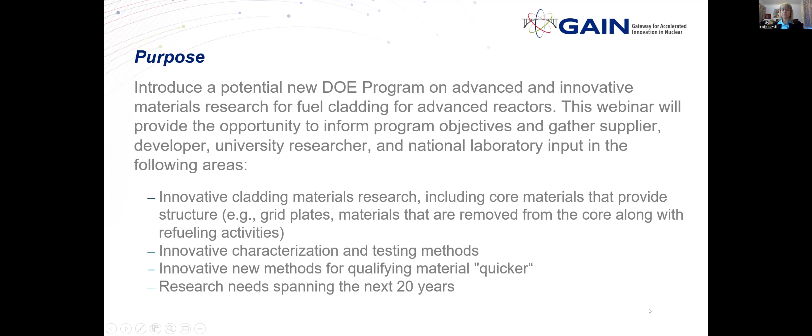The agenda is divided into 3 segments. First, we'll have introductory presentations, followed by presentations on advanced nuclear industry gaps and needs. The final segment will be a focused discussion on those gaps and needs, and this is where we want to hear from you. We want to hear your thoughts, any questions that you might have, and the feedback that you're willing to share. But please don't feel that you need to wait till this focused discussion to share feedback. If a thought crosses your mind, put it in the chat and we'll address it as we are able.

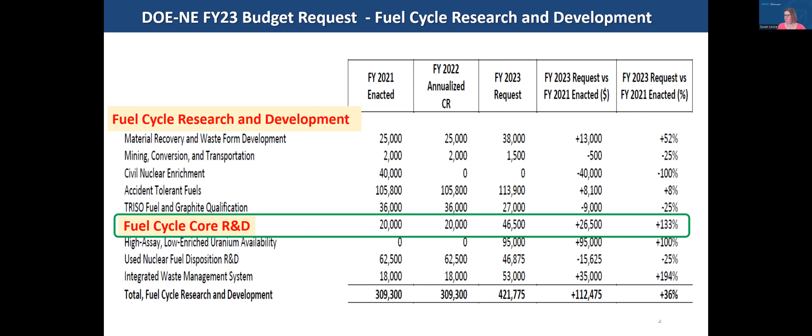So here's a list of the different areas that the fuel cycle core R&D plans to support. And the new innovative nuclear materials programs, as listed here, our goal is to continue our leadership in nuclear materials and our competencies in research and development for nuclear materials to support nuclear energy in the US.

We also want to continue to build on and capitalize on the developments in modeling and simulation capabilities, on instrumentation, on testing, characterization tools. All of these put together should make the process of going from materials discovery through research and development to commercialization much more efficient and quicker than it has been in the past.

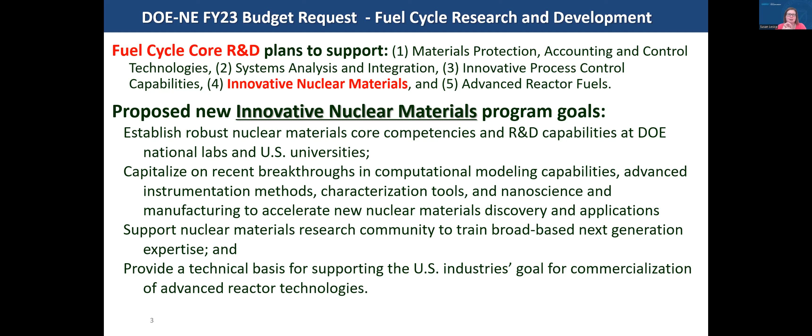So here we go. So here's the goal of the workshop. We want to seek stakeholders' input, and in our case, stakeholders is defined as the people that will actually use the results of the research, as well as the folks that will be doing the research. So this includes the reactor designers and suppliers, to the researchers at universities, national labs, EPRI, etc. And so with that, we wanted to get input into the development of the program, both on the focus of the program and how we plan to administer the program.

We also have a list of what we're not looking for. We are very much focused on research and development. That is the area that has been identified as the gap. We have a lot of other work going on in the demonstration and further down on the commercialization line. So we're staying more, our focus is much more on the lower TRL type of research.

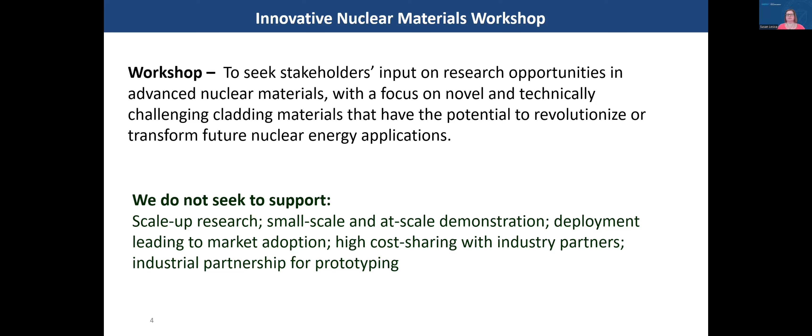So next we have a list of questions, really just kind of to spur some thinking of what could be needed, what type of materials do we need, what type of models do we need in order to predict how the materials will perform and how the environment will affect mechanical behavior further down the line. As you know, these reactors last for a very long time, and we need to be able to predict long-term behavior. I won't read through this whole list in detail, but I did want to put it up just to kind of get you started thinking in this direction.

I also did want to talk a little bit about the administration of the project. We've also been asked, how will we fund the research? Will it be direct funding? Will we have competitions? That type of thing? Will it be cost sharing? And traditionally, we don't do very much for cost sharing for this level of R&D. So our plan right now would be funding the work directly, or either directly or through competition.

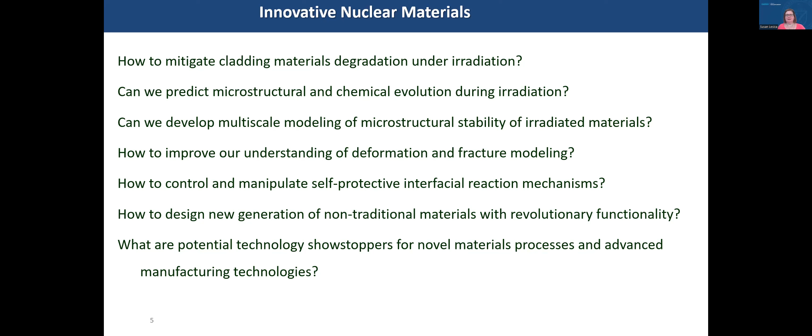So the administration still hasn't been decided, and once we have more information on what we're going to actually perform the research on, I think that will really help us define how we administer the program. So that is the end of the slides that I have. I would be happy to take any questions.

There is the chat feature, if you prefer to write your question or comment in there. Okay, it doesn't look like we have anything in the chat. Okay, I think we can go on to our next presentation then.

So in order to pull all of this information together and inform our decision-making when it comes to the priorities of the program, we have Stu Maloy from PNNL who has graciously volunteered to do that with us, and his experience in this field is going to be extremely valuable to us in developing that. And so now I will pass it on to Stu.

My name's Stu Maloy, and I'm a nuclear materials advisor at Pacific Northwest National Lab, which I've only been in that position for about 3 months now. Previously, as most of you know, I was at Los Alamos, and I was there for about 33 years. So I have a lot of experience in developing and testing materials for cladding applications in reactors. So what I wanted to start with, which I think everybody knows, is that materials, as much as we'd like them not to do this, they can actually fail in nuclear systems.

And that's what, in developing materials in this program, we'd like to avoid. One failure that happened many years ago was, as shown here, where an actual duct that saw significant swelling failed when they went to actually pull it out of the reactor, leaving the fuel in there. So that's not something you'd want.

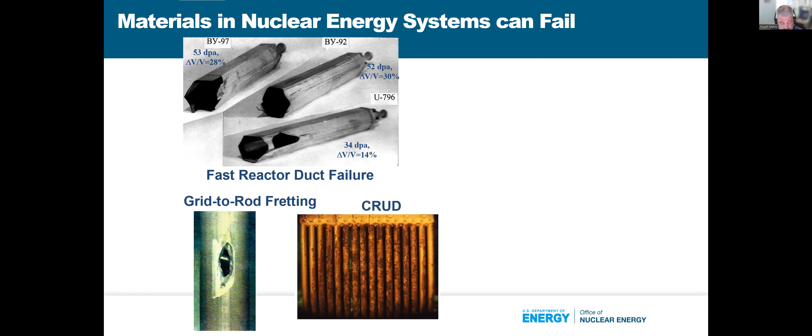Another is grid to rod fretting, which can happen, for example, even in just light water reactors, where you can go right through the cladding with sort of normal operations. Crud is something you want to avoid as well, where it's just a corrosion deposit that can collect in your reactor. And then also larger scale corrosion, as shown in this Davis-Besse reactor vessel head degradation, is something you want to avoid as well.

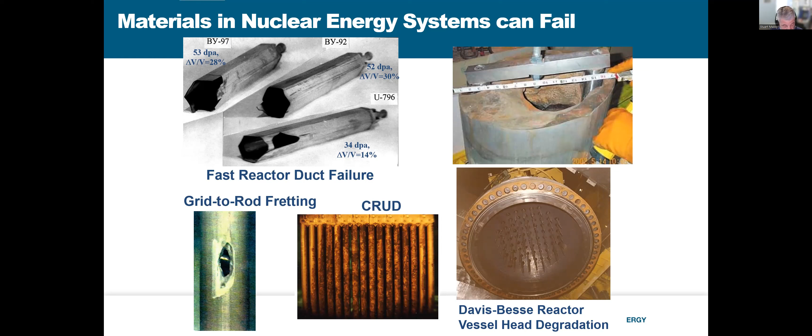So we want to be able to develop materials that last longer in reactor, that we also know the lifetime very well, so that we can avoid having a failure before we actually take these materials out and replace them. So in order to develop these new materials, we have to know what the extreme environments are. The extreme environments for a cladding material come from different things that they're in contact with under irradiation.

So for developing a high dose radiation tolerant advanced reactor cladding material, you have to deal with many different areas. First, you have to deal with interaction with the fuel, especially in a metallic fuel. If the cladding or the fuel is going to stay in this case, we want to push it to higher burn up. If it's going to stay in the reactor for a long period of time, you can eventually get interaction between the fuel and the cladding that can be pretty large in a metallic fuel.

And as that continues to react, it can reduce your cladding thickness, which reduces the effectiveness of your cladding to hold the fuel in the reactor. So there we'd want to be able to develop either better alloys that actually resist that without having to add a coating or a liner, or maybe something where we're actually adding a coating or a liner to the fuel.

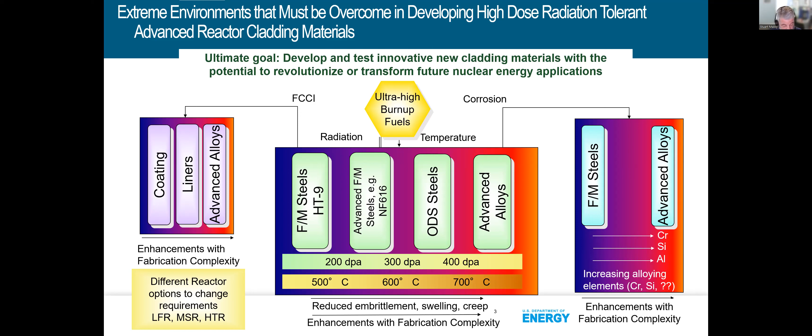And those laths provide sites for recombination of interstitials and vacancies that are made under radiation, helping to push this material to higher doses. It also has fine carbides in the microstructure and other things that give it good void swelling resistance.

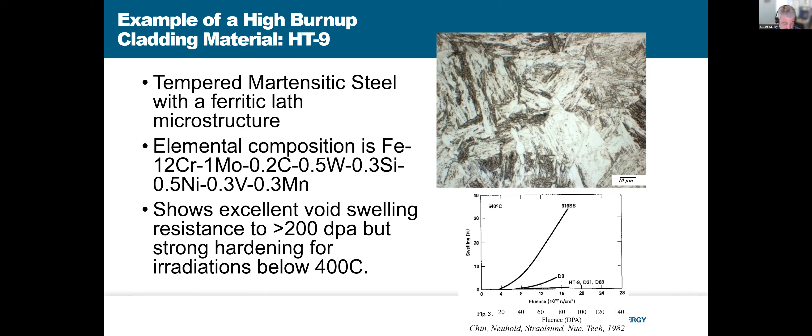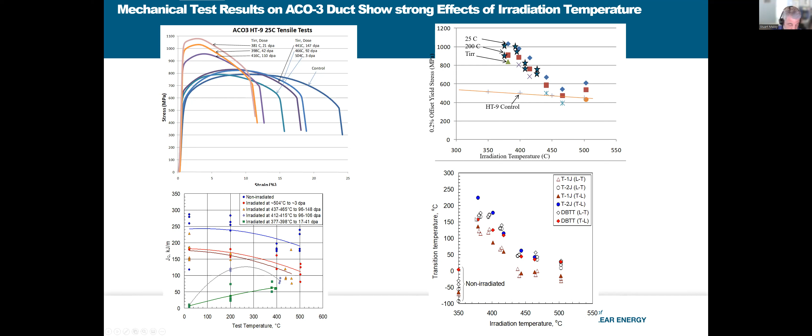And the sodium handling temperature for a sodium fast reactor is around 200 degrees C. So you're getting to the point where you're close to becoming brittle at the sodium handling temperatures, which is not what you want. So one issue is low temperature embrittlement, and it's strongly connected to its microstructure.

You do see a little bit of void swelling in this material, but that's quite low, only 0.3% after 155 dPa. At higher temperatures there actually wasn't much of a change at all. So the microstructure is clearly important, and that's going to matter when we're developing better materials for advanced reactor cladding applications.

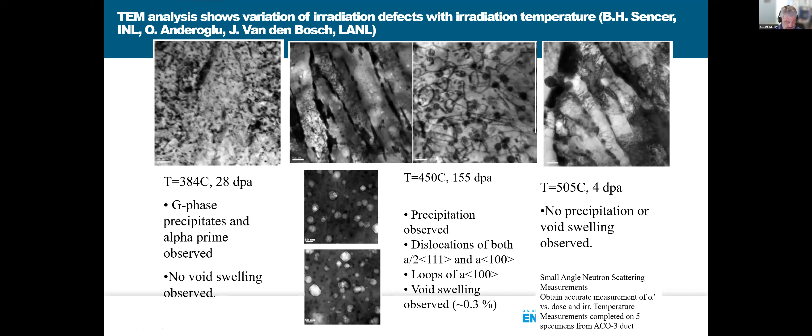So what are the limitations in service life with HT9? The first, as I pointed out, is low temperature embrittlement below 400 degrees C. There are some better ferritic-martensitic steels that don't show as much low temperature embrittlement, but even below 350, these materials do show some low temperature embrittlement.

Fuel clad chemical interaction—I didn't go into this, but for high dose or high burnup irradiations with HT9, you do start to get interaction between a metallic fuel and the cladding. So that's something we would have to either put in a coating or use a new material to avoid.

And then one of the big issues is low creep strength. So even though HT9 is a really nice material, above 600 degrees C it does show reduced creep strength, even compared to an austenitic stainless steel like 316L stainless steel.

So can we develop materials for some of the advanced reactors like molten salt reactors, where they want to go out to maybe 700 or even 800 degrees C? We really would need to improve the creep strength to use a material like this for that application. And then you also can run into radiation-induced segregation at high doses, and also some second phase precipitation.

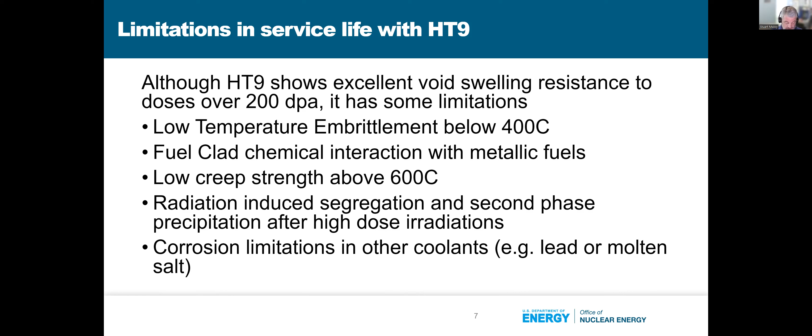There are severe corrosion limitations if you're trying to use HT9, or HT9 in contact with coolants like lead or molten salt. So these are some of the limitations of one of the best materials out there, and these are the things we'd like to try and overcome with new and improved materials.

What's the overall vision of this program? We might modify it based on discussions today, but our overall vision is to develop and test innovative new cladding materials with the potential to revolutionize future nuclear energy applications, especially these new advanced reactors being developed right now. That means developing new alloy compositions, whether high entropy alloys or something else, that may be able to meet the corrosion issues and high dose radiation limitations for some of these applications.

Coatings to eliminate fuel-clad chemical interaction, or a better material with improved corrosion resistance. Innovative microstructure is also key—it's the microstructure that really leads to the extreme hardening and reduction in properties in these materials. If we can develop new innovative microstructures through different manufacturing techniques, maybe we can avoid the significant hardening at low temperature.

Innovative manufacturing and joining methods are also needed. In a lot of these new materials, joining is not as simple as for a ferritic martensitic steel. So along with developing a better material, you may also need to develop the joining method that goes along with it.

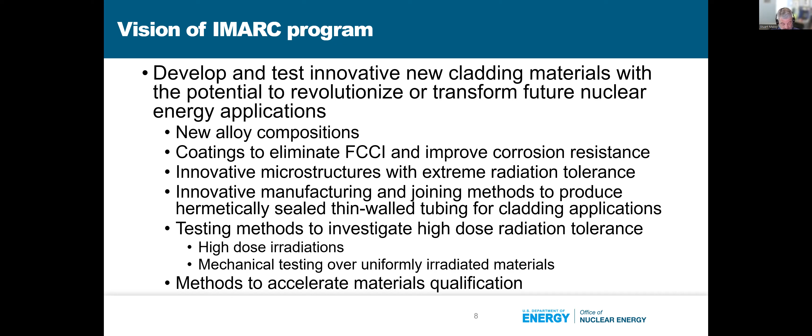There are other materials research programs in the Office of Nuclear Energy, and what I'm aiming to show here is how they complement and work with each other.

Some of these are not fully funded yet, but these are proposed programs for FY23, and some are already here. There's the innovative materials for advanced reactor cladding program we're talking about today, centered on cladding for advanced reactors at the lower TRL level—pretty much from TRL 1 out to about TRL 4.

As you move to higher TRL levels, there's a new program that was funded a bit in FY22, and we're hoping to increase funding in FY23, called the Leading Innovation in Fuel Technology, or LIFT program. It's a metallic fuel qualification program planning more testing and research on HT9. The connection is: if we can develop better materials in the IMARC program, once we get it to higher TRL levels, we could pass that into the LIFT program. So there's nice coordination there.

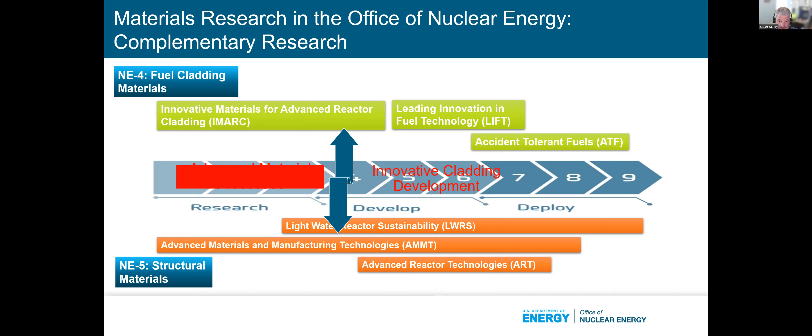But the other program I didn't put on this list that's really important to all these programs is Nuclear Energy Advanced Modeling and Simulation, NEAMS. As already pointed out by Sue, developing models for understanding high dose radiation tolerance in these materials is really important, something we'd lean on with NEAMS for our Innovative Materials for Advanced Reactor Cladding program. But NEAMS also develops models that help understand cladding development for the LIFT program or the accident tolerant fuels program, as well as Advanced Materials and Manufacturing Technologies, LWRS and ART. So this Advanced Modeling and Simulation program has a strong connection to all of these materials programs.

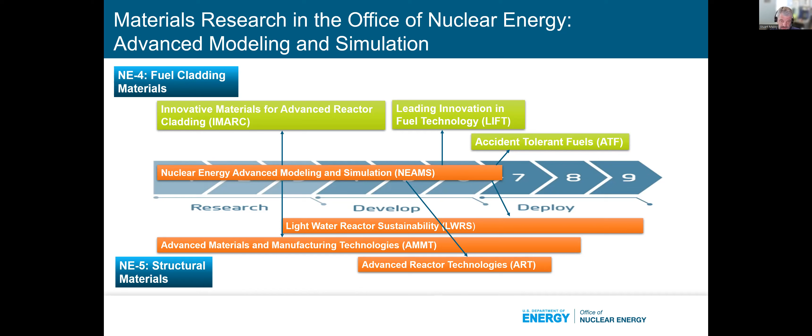So what innovations—and this probably is not a full list—but what innovations are going to be required so we can develop this advanced reactor cladding?

First of all, if we're going to develop better advanced alloys, some alloy classes like high entropy alloys or others, there's a huge number of different alloys you could possibly look at, so we really need to look over a large...

Yeah, somebody—okay, I guess they muted.

We need to look over a wide range of composition space. That will be important in narrowing down the compositions to one that may specifically apply to cladding that could actually have an application in an advanced reactor in the future, or developing better...

When we talk about cladding for these reactors, in some cases the cladding is up to 9 feet in length, with a 0.5 millimeter wall thickness and 7 to 10 millimeters in diameter. So that technology itself is difficult. If we develop a better material, we need to be able to extrude it or pilger it to the long lengths needed for these advanced reactor technologies.

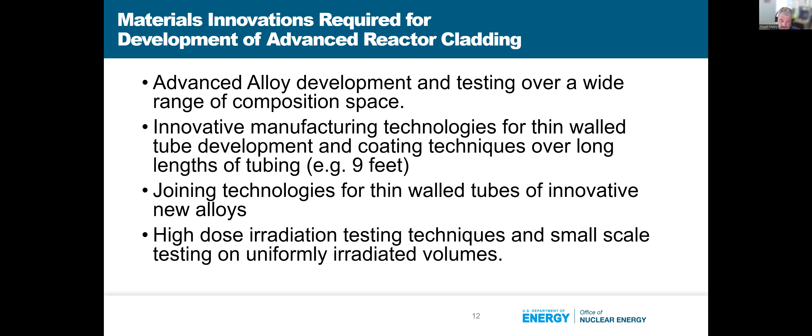And as I've already pointed out, we don't have a test reactor in the US, for example, for doing high dose irradiations. So we need high dose radiation testing techniques. One could be ion irradiation on materials, so we can do one-to-one comparisons of new materials and small scale testing to understand changes in mechanical properties after high dose radiation. So I wanted to point out how we can obtain some of this high dose radiation data.

I think, just to make sure you understand, even if we had a test reactor, at most, if you take BOR60 for example, a sodium cooled fast reactor, at most you can get is about 20 dPa per year total radiation dose. So if you want to understand cladding changes from neutron irradiation, that in itself could take 5 years just to get that irradiation data.

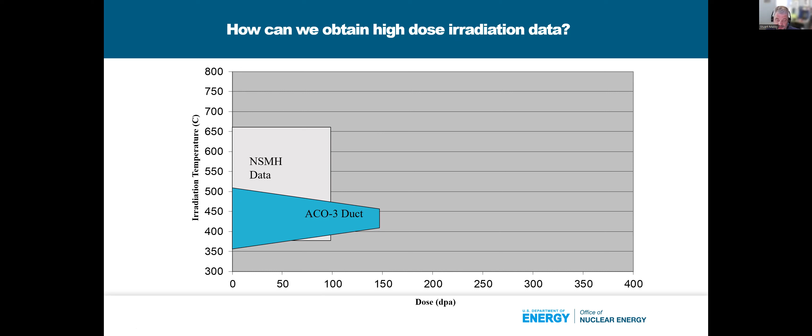So in many cases, we're going to be relying on previous data. There is, from the Nuclear Systems Materials Handbook, data out to 100 dPa on mostly austenitic stainless steels, maybe a little bit on ferritic martensitic, but mostly austenitic. From a recent analysis done about 10 years ago, which I summarized in this talk, on the ACO3 duct, we got some data out to about 155 dPa, but over a specific temperature range. From materials irradiated in FFTF, there were actually some that went out to even 200 dPa. So there is a lot of irradiation data available.

What we're trying to do with an irradiation and a collaboration with TerraPower, this is also an irradiation that was done in the Phoenix reactor. There we went out to about 75 dPa, and each one of these irradiation campaigns can take 5 to 7 years in itself, just for the irradiation. Unfortunately, with this matrix irradiation, we've been waiting now almost 10 years just to get the samples back from France.

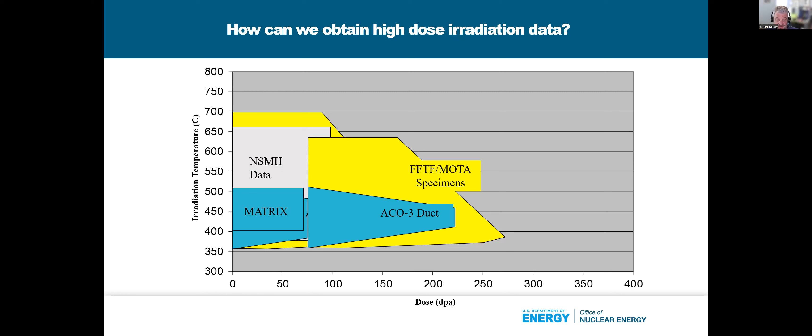So one of the things we're trying to do is take advantage of the fact that we did irradiate material to a high dose and irradiate it further. Through a collaboration with TerraPower, we sent some of the ACO3 duct material and some of the FFTF MOTA specimens to BOR60, and they were irradiated in their reactor until about 2019. We're now working with TerraPower to hopefully get those back in the next year or so, hopefully early next year. That will be very important data, because it'll get us out to perhaps up to 250 dPa. But that's not even on these advanced materials that we'd like to develop here.

So how are we going to get there? I think one of the areas we're going to have to lean on a lot is high dose ion irradiations, but we'll have to couple that with strong modeling and simulation so we can understand that data and correlate it with the neutron irradiation conditions we'd like to use those materials at. So it's a challenging problem, it can take a lot of time, and we're going to have to use all of our resources to get this high dose irradiation data on these materials.

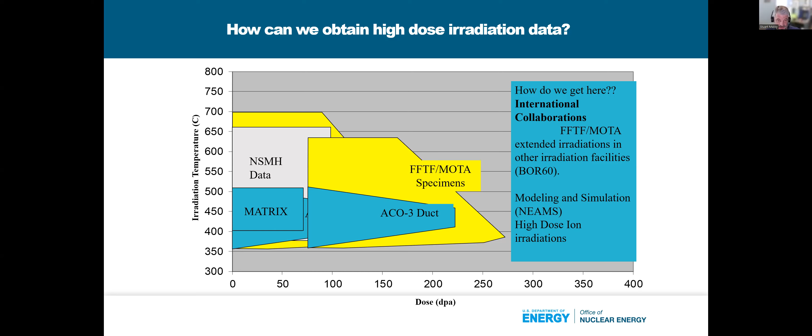So the overall aim of this workshop, which we've already said a couple of times here, is to get input from you, get input from industry, get input from national labs and universities, so that we can lead to developing the priority research directions for this new program.

So what we're going to have after this, we have a little bit of time for questions, but after this we do have some additional talks from industry, a little bit of summary of the workshop that was held at the ANS meeting, which I know many of you couldn't attend, so I wanted to make sure I summarize that for you. And then they'll be open to you, I'll lead into each area, for getting input from you on different subject areas for this program.

So with that, I think we do have a little bit of time for questions. There was a question that says: can you tell what materials need to be joined in the reactor core? Is it functional or structural joining, or both?

So yeah, the materials that we need to do joining on are these materials for cladding. In order to have a functional cladding material for an advanced reactor or a new fuel, you need to be able to seal that cladding at the end. So whether it's a friction stir weld or a regular TIG weld or something, it has to be one that can give you a hermetic seal of that cladding material, to hold the fuel in it.

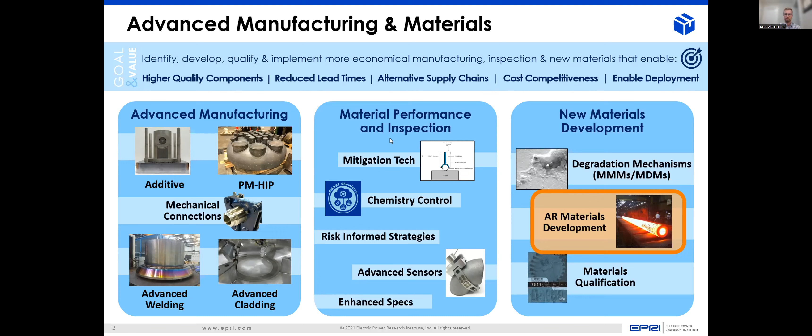This audience is well aware, so I won't spend too much time on this slide. But the three big areas or buckets we see in the challenge of advanced reactor materials and their deployment are certainly codification. When we talk cladding, especially fuel cladding, it may not necessarily need ASME code qualification, but even capturing that in-air test data is a significant effort. And if we're talking cladding in terms of functional cladding, corrosion resistance on internal wetted surfaces of structural components - there's not necessarily a structural aspect, but certainly still a codification piece there.

We talked about, as Stu mentioned, and Gary and Mike mentioned, the environmental effects and the long lead times to capture irradiation data. And that's not everything - it's corrosion in other areas too. And then there's the challenge of separate effects versus combined effects.

What I see as the biggest challenge, not only for IMARC but other development programs, is how do you do testing that is broadly applicable and can be used across reactor design types. That's the biggest challenge, and I see the longest lead time is being able to correlate irradiation data, but in a molten salt versus a sodium environment as well.

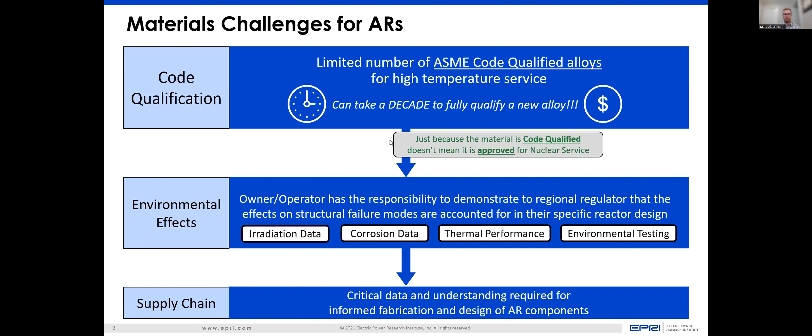And then the big piece that EPRI is really supporting, and I think Stu hit the nail on the head, is we can develop the best material in the world, but if we can't produce it in the product forms needed and the quantities needed, all this research is for nothing. So the supply chain and having that understanding of informed fabrication and design is really critical - having that engagement across the supply chain from early R&D in programs like IMARC all the way through the end user that's going to be operating and constructing these plants.

Again, this audience is well aware, but here at EPRI, with our owner-operators and utilities being a vast majority of our membership, we see all the unanticipated material challenges in first-of-a-kind applications. Obviously we talked about the new environments and then the fabrication issues for new materials and the high scrap rates, or extremely large increases in cost to get very specific, minute specifications.

All that to say, codes and standards specifications are needed and a big piece of this. But what can't be lost on industry is even once you get something codified, the challenge is that those are minimum requirements, and having demonstrations, having a deep understanding of how the fabrication, weldability, and joining of these materials really impacts things. So I want to underscore the need for materials research during design and continued through fabrication and demonstration is critical in reducing overall project risk as we talk about advanced reactors.

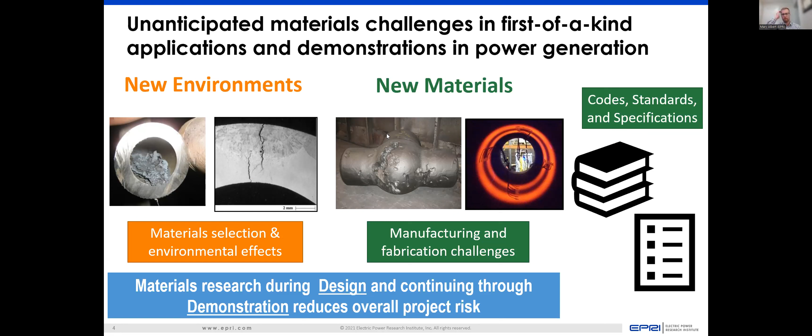So where have we been at EPRI in some of these efforts? We have the advanced reactor materials gap analyses. This was a series of 4 gap analyses focused on the 4 major reactor coolant types.

This was a review of available data to support material implementation into designs, so early R&D or existing data on what candidate materials could be used. This provided a summary table within these 4 reports summarizing the candidate materials for each reactor type and a summary of what data does and does not exist.

These 4 gap analyses are publicly available. You can search the report numbers once you get the slides on EPRI.com and download those reports. Ultimately, the focus of this was how do we get to a rational planning and coordinated materials development and validation program for these advanced reactor designs.

Exactly like Steve said, forums like this are helping to inform that exact conversation. And that's where the roadmap was intended to be a conversation starter and a first effort to go down this path. I will put a caveat that our road mapping was heavily focused on structural materials and cladding.

I'll call it functional cladding of wetted surfaces. There was certainly discussion on fuel cladding. HT9 is obviously probably one of the most researched fuel cladding materials in the past. So I want to caveat that for this audience today and our topic today.

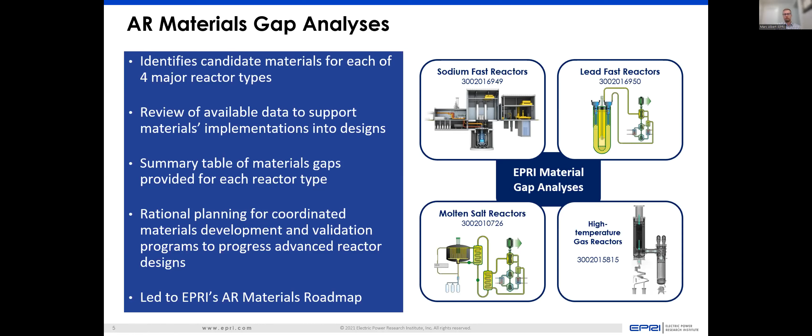The Advanced Reactor Roadmap really was broken down into a structure on reactor types, so by coolant type, then the material types. So we have areas for austenitics, ferritic martensitic, the nickel-based alloys, and then some other areas of graphite, corrosion needs or data gap analyses, and then cladding.

And again, some fuel cladding discussion, but primarily more of a functional cladding for internals and internal wetted surfaces. And as I mentioned earlier, the structure of the roadmap is really broken down into 3 categories.

So your in-air properties for codes and standards like ASME, and then your material response in environments, including corrosion and irradiation and those combined effects. And then not to be lost is that confidence of supply chain.

Can we actually produce these materials from laboratory heat sizes to full scale, integrated with plant designs and your major component OEMs, as Stu mentioned.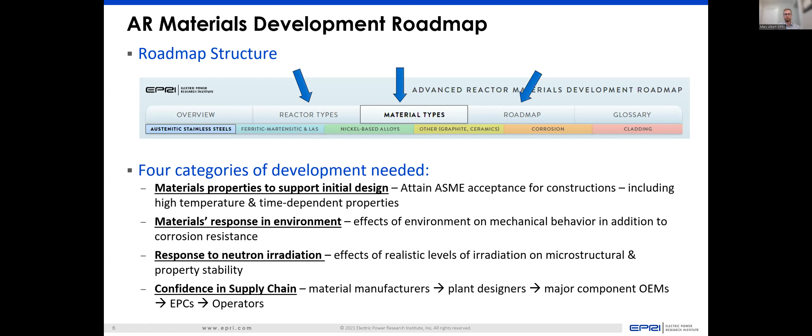So before I take a deeper dive into the roadmap, because I think that's where most of the panel and the folks on the line today really want to hear, what are the materials or candidate materials. This is our kind of initiative and what EPRI has going and ongoing.

So we've done the gap analyses, identified those gaps, and worked them into roadmap priorities. And we're now at the point where we need to, as an industry, have a coordinated materials development and validation effort. Stu and everybody talked earlier about the long lead times and aggressive deployment timelines of these reactors.

So EPRI really focused on how do we get more coordinated as an industry, supporting workshops like the one today. But we've also been in the process of forming a technical advisory group to help really come together as an industry on what testing programs can be done, need to be done, to help accelerate the deployment of some of these materials.

And to that end, a lot of our research today is really focused on developing those accelerated qualification approaches. So Gary Was has work done at University of Michigan, correlating ion to neutron irradiation, as a perfect example. Modeling and simulation, and where can we take advantage of some of those approaches.

And then another area that we have ongoing research is really artificial intelligence and machine learning. I think there's no substitute for physical testing. The models are helpful, but aren't going to get us the full way there.

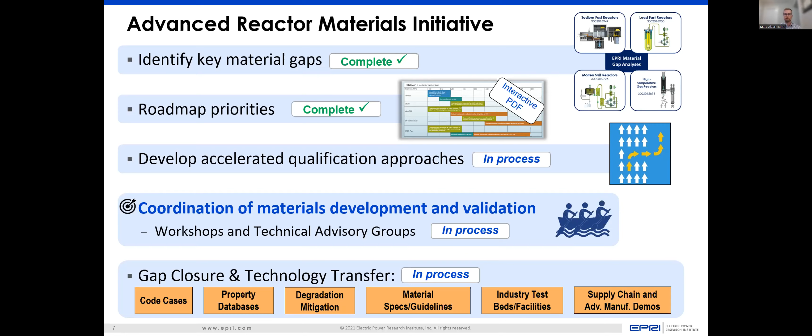So the roadmap here, this is probably an eye chart, and the next couple of slides have zoomed in versions with more granular detail. But the roadmap is broken down by reactor types, as well as material types, and then the road mapping section.

So within the roadmap section, we have it broken down by austenitics, and I'll go through some of the details here just to maybe get some of the conversation going as we go forward.

Certainly these are more structural related, but I think for this audience there's going to be no surprises: 316H and alloy 709, D9 stainless, and EPRI is also doing some work on CF8C+, which is a wrought version of a cast alloy that EPRI is working to get into codes and standards. It has some creep properties comparable to some of the nickel alloys, but at the cost of austenitics.

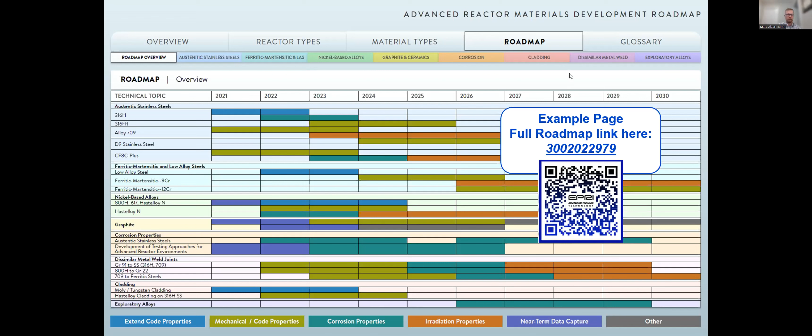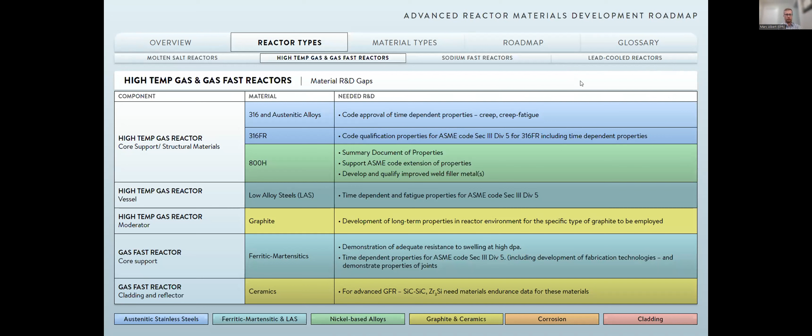So I realize I'm coming up on the end of my time here. As I said, you can download this report—these slides will be available to everyone after the meeting—broken down by gas reactors and then different material types. So here's an example of the more granular austenitic stainless steel road mapping.

Broken down on code properties, irradiation, corrosion campaigns that are needed, and some of that data. So again, very high level for the technical expertise on the lines today, but this is kind of a conversation starter to help guide discussions on where some of these programs need to develop and where we could be more coordinated on capturing the data across industry. Because the last point I'll make is there is a ton of research to be done over numerous years and millions of dollars, and if we can be more coordinated in our effort and combine resources, I think there's a win-win across the board for everyone.

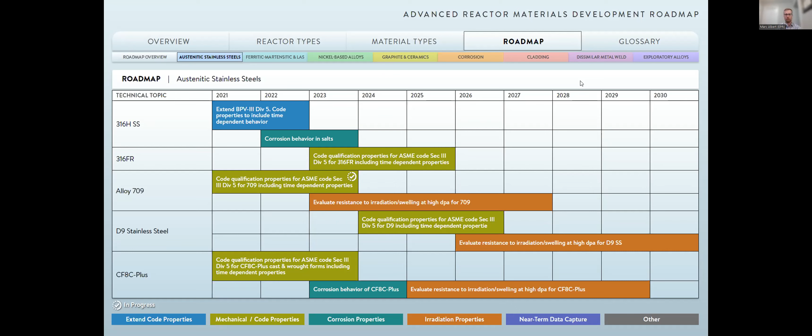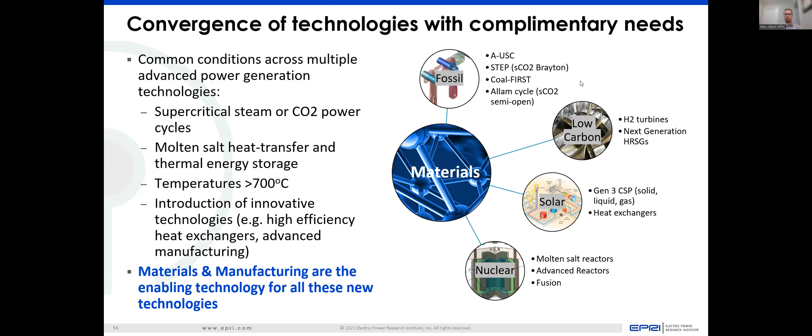So with my closing slides here, I will half plug and half let everybody know, as part of this coordination, EPRI has this expertise in the high temperature arena. We've been supporting the fossil industry for years and have quite a bit of capability in creep and creep fatigue and time dependent properties. We're really seeing at EPRI this convergence of similar needs and challenges across fossil, thermal energy storage, concentrating solar, some low carbon initiatives, nuclear, and even fusion.

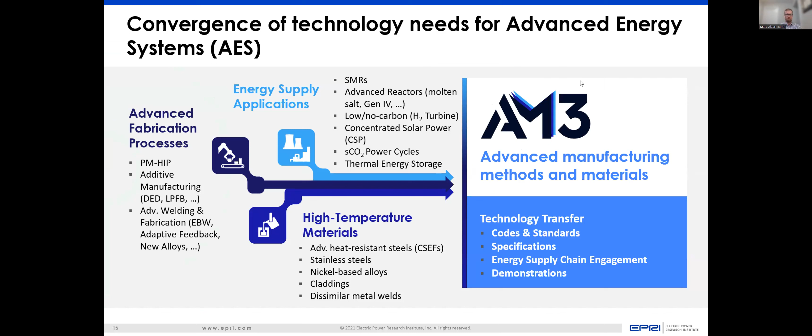So with that, we've assembled an initiative called AM3, which is Advanced Manufacturing Methods and Materials. No surprise, this is kind of aligned with the DOE's AMMT program. I think we had a similar thought process and came out with these initiatives or realignment at the same time.

With that initiative, we've had a large investment in our laboratories and material characterization and testing, a lot of additional creep and creep fatigue frames, and a lot of material microstructure characterization capability has been added to our facilities. So wouldn't be anything without a shameless plug here at the end, but all to say, this is where leveraging test facilities and these capabilities is important, making sure we have the test facilities needed to enable some of these deployments.

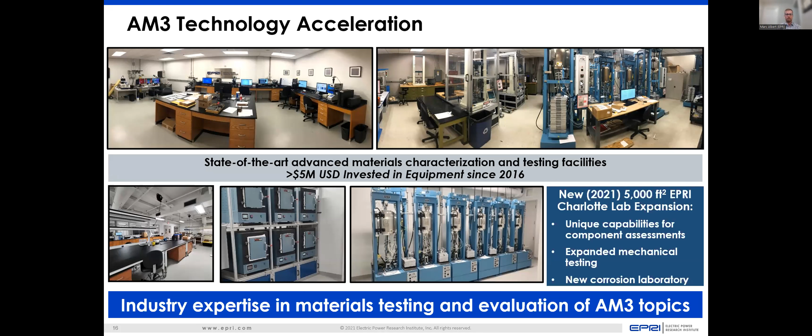So with that, I'll wrap things up and turn things over back to Stu.

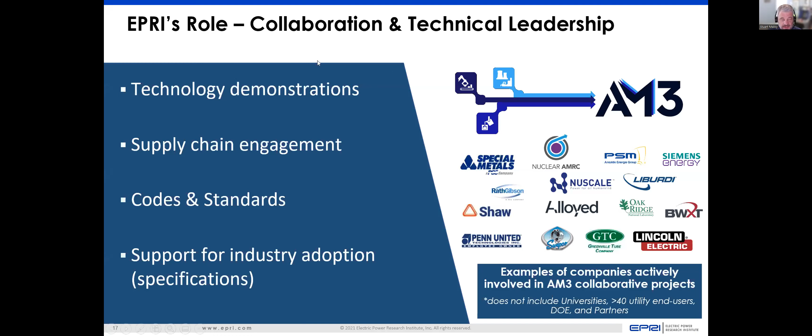Okay, Mark, thank you very much. That was really a nice overview of a really nice roadmap that's been developed by EPRI, and it was neat to see the capabilities you're building up too. So that was excellent. I know we're running out of time here, but Cheng had his hand up for a while. Cheng, did you have a quick question?

Yeah, it's one quick question for Mark. I downloaded the roadmap as soon as you showed it, and it looks like the roadmap is based on specific reactor designs, with specific coolants and structural materials in place. I was just wondering, because the devil's always in the details, if there's any guidance as a result of your program that can group certain materials together.

I'm just wondering, like the work you're doing on, for example, fluoride salt corrosion on 316, will your results have some impact on, for example, chloride corrosion on 316 as well? Similar question on your work on binary iron-9-chrome, does that extend to T91? Iron-12-chrome, does that extend to HT9? Because I think the industry, at least our reactor designers, will find some of this data for similar materials and assume it would behave similarly, but we can't use the data as is because it's not exactly the same.

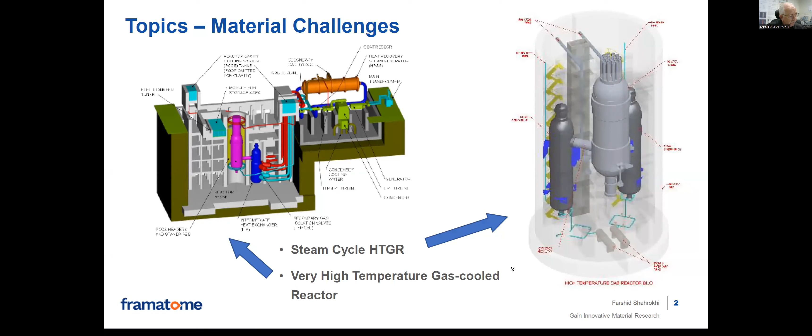Next slide please. Framatome has been involved in developing high temperature reactors since the early 60s through our predecessor companies, starting with the German AVR pebble bed reactors and HTR module back in the 60s, 70s, and 80s.

And in the early 90s and in the 90s and 2000s, we were partnered with General Atomics and the Russian Federation on the GTMHR project. Then in mid 2000s, we started working on our VHTRs, codename Antares. It was a 600 megawatt prismatic core, indirect cycle, combined gas turbine generation with a core outlet temperature about 850 degrees C.

And it dove into the NGNP project back in the late 2000s. So we were one of the three teams that were developing our initial design of the high temperature gas cooled reactors. Based on that background, we ran into some issues, material issues that I will discuss a little later. So we stepped back and looked at a steam cycle, a lower core outlet temperature.

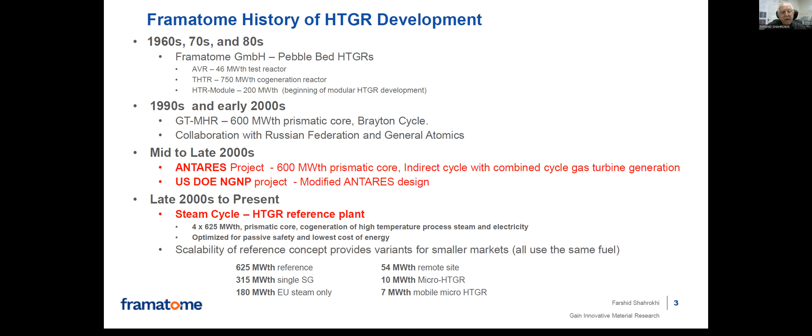So our 625 is again a cogeneration reactor. It produces electricity and process steam, and it's mainly designed for process steam. The steam market, the process heat market, is captured by natural gas and fossil fuels, and electricity can be produced by even light water reactors. So we're not in the market to compete with electricity, because the fuel for our reactor is more expensive, as it uses triso particle fuel. And although we have a 43% net efficiency, still the electricity unit price is pretty high.

Our core inlet is 325, core outlet is 750, and we can produce steam at 566 degrees C. And there's plenty of market for that on both U.S. and overseas, and the safety afforded to us by triso particle fuel allows us to co-locate it near the actual applications, which most of the steam users currently have basically their natural gas steam plants right on their plants.

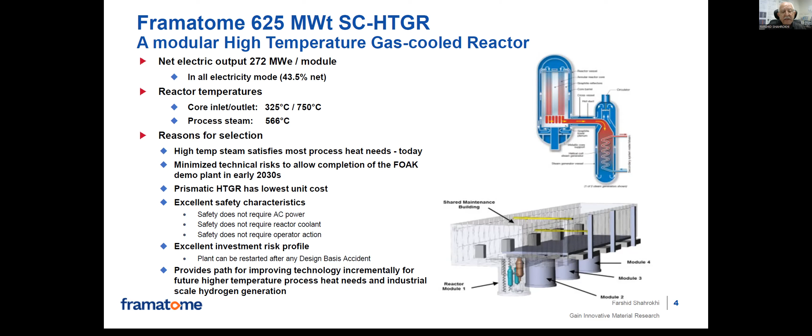The secondary side originally was a gas cycle, and that's when we ran into some issues with our IHX. We could not design or come up with materials that do the gas-to-gas heat exchanger at these temperatures that would last any period of time. We looked at compact heat exchangers, a variety of compact heat exchangers, and that's where we actually put this design on ice for a while to find out what we can do.

The primary side was fine, but this intermediate heat exchanger was difficult for us to come up with a design. More recently, in the past couple of years, we're looking at a salt secondary, and I can talk about that in a bit regarding what issues we have with the salt secondary.

Originally it had a gas turbine for electricity generation on the secondary side, and also process heat at a variety of temperatures, and on the tertiary side we had a steam generator, and then the standard Rankine cycle on the same shaft to produce electricity. At full electricity mode, it was 290 megawatts of electricity at about 49% net efficiency for this reactor.

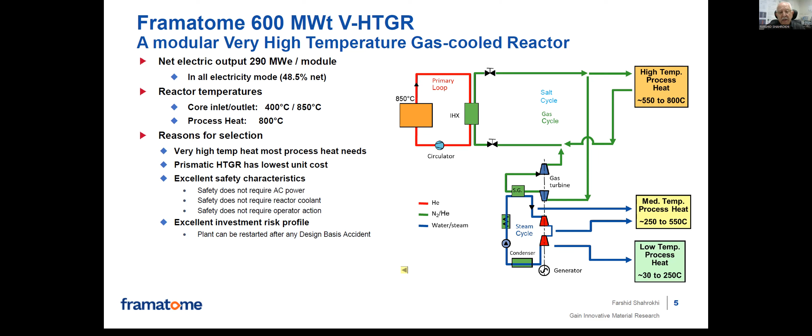Of course, in this case there's not steam anymore—it's process heat out up to around 800 degrees C, which is quite a bit of market there, currently being catered by natural gas. Next slide, please.

So this is the real slide for this particular venue here—the material construction for these two types of reactors. The black items are materials available now, and the red ones require codification and development. For our steam cycle, most of our materials are available. Our fuel, obviously, is UCO kernel triso particle fuel. It's been characterized with information taken over the last 20, 25 years under the AGR program.

Our graphite—we have several graphite types: SGL carbon, NBG-17, and Toyo Tanso 110, our graphite of choice for both reactor types, our steam cycle and our very high temperature reactor. For our vessel system, both the reactor vessel and steam generator vessel and a cross vessel which connects the two together—for our steam cycle, we have a standard PWR steel, SA508/533, that doesn't even need cladding like our light water reactors need.

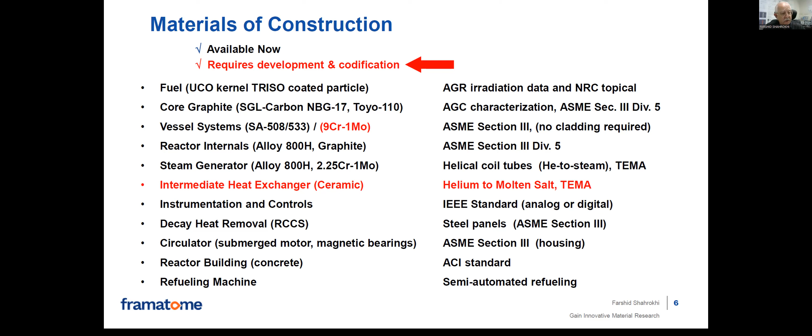Next slide, please. So these next two slides basically tell you the temperature ranges that the industry needs as far as process heat is concerned. Like I said, electricity is a byproduct for us - we can load switch, but our main goal for this reactor concept is producing process heat for the industry. These are various temperature ranges and various reactor types. The first one is light water reactors - of course, that's a very low temperature. Our steam cycle can cater to a variety of steam users. There's quite a bit of demand already, and with the safety of our reactor, we can basically co-locate these with the steam users.

Our VHTR, the Antares, goes up to around 800 degrees C, and there is plenty of demand there. That design, the fuel and graphite, can withstand the very high temperature reactor, which goes up to around 1000 degrees C, but that's something for many years from now. So the possibility of advancement is there, a stepwise increase of the core outlet temperature, and the design is there.

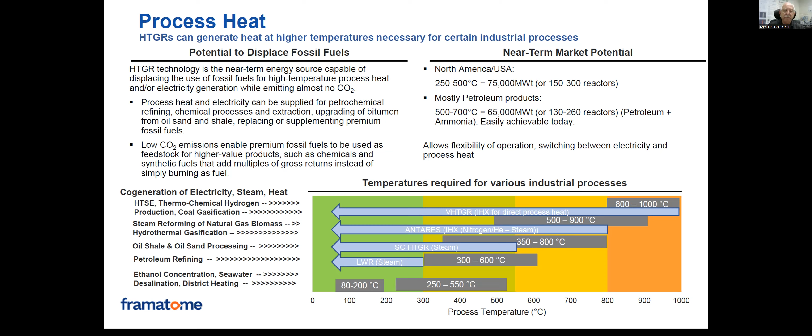Next slide, please. So this is basically how we're going to do this - it's divide and conquer. We looked at our VHTR, and the same fuel for VHTR is used for HTR, and the same siting, same licensing process, same safety case is used for these designs. But of course, the last three items - the high temperature materials, the heat exchanger, and the very high temperature process interfaces - are issues that our next generation, or higher temperature version of our reactor, is designed for.

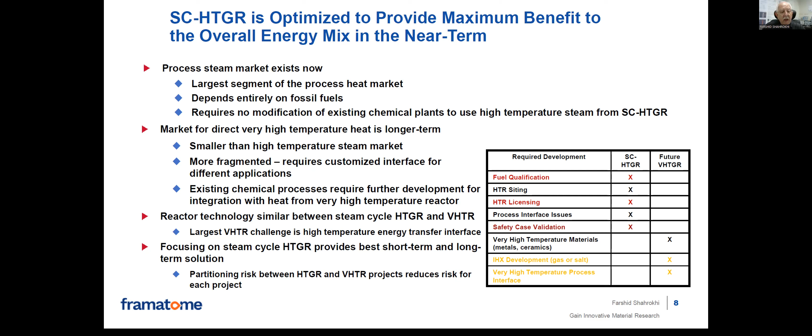Our commercialization strategy is to work on the steam cycle SC-HTGR, with a view that there is life after steam - this lower temperature, around 750 degrees, low temperature. There's life after that, but there are some research needs that type of reactor needs. I think that's all I have, and I'm open to questions.

Okay, thank you, Farshid. This really was a nice overview of high temperature reactor concepts that you're looking at, but it also pointed out areas that - and I should have stated this from the beginning - there are some areas in your presentation and in Mark's presentation that wouldn't be covered under IMARC, but maybe covered under AMMT. But the importance of this was to see where your needs are, and I think that was really useful.

And thank you. Are there any questions? I actually don't see any questions. We're running a little behind, so maybe what we'll do is move on to the next presentation. So thank you again, Farshid. And then I'll see if I'm successful to share my screen again here. Let's see.

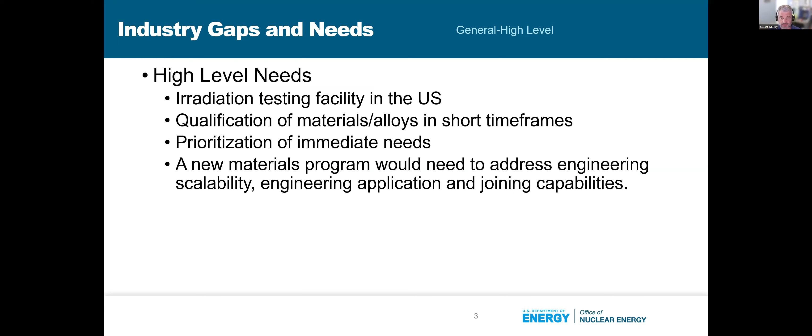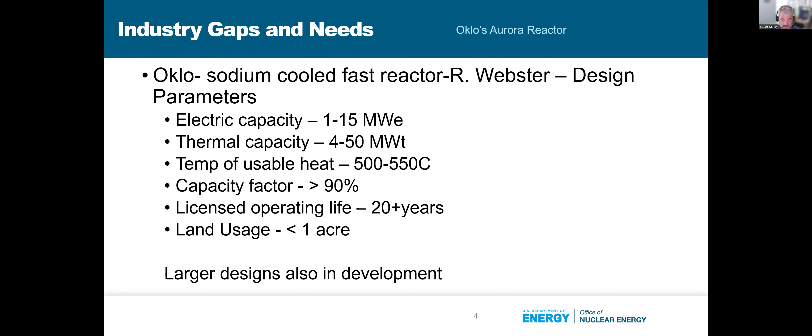Let me start with the first, Oklo's Aurora reactor, a sodium-cooled fast reactor. Ryan Webster gave a nice overview of this reactor design. Its electrical capacity is 1 to 15 megawatt electric, thermal capacity up to 50 megawatt thermal. Usable heat is in the 500 to 550 C range, capacity factor greater than 90%, and licensed operating life of over 20 years, and it's a small reactor. It needs less than about an acre. There are larger designs in development, but what he went over was the smaller reactor design they're trying to push forward.

What he did really nicely was go over their needs - what are their materials needs for cladding and core materials for this reactor concept. In the near term, they just need existing alloys that have a large amount of radiation history on them, so that's ferritic martensitic or austenitic stainless steels. Even those, like HT9 for example, are challenged by limited supply chain capacity. It's not actually easy to get all your components made in these materials right now. That's one of the things they have to address from the beginning, and that's not something we'd cover in IMARC, but I think it's important for them in the near term.

But in the intermediate term is where we get into areas I think this program could address in the future, in the 5 to 10 year time frame. Can they develop better FCCI barriers for these materials? Adding FCCI barriers is really important to them.

Can they make incremental improvements in the existing alloys to make better ferritic martensitic steels, or make some improvements in austenitic alloys? And can they look at commercial availability of some new alloys, such as a refractory based metal alloy or maybe something else? So they are looking at new materials in the 5 to 10 year time frame.

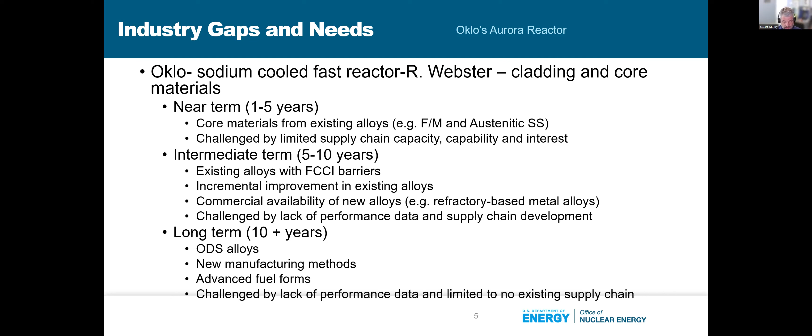The next talk given at that workshop was by Westinghouse on their lead fast reactor, by Mr. Tatli at Westinghouse, who started with a good overview of their design parameters. Reactor power is a bit larger than the one I just talked about, a 450 megawatt electric heat output, with efficiency of up to 47%. So really good.

The primary coolant is liquid lead. The secondary coolant would be supercritical water. The nice thing about this reactor concept is the ultimate heat sink is to the atmosphere, so it doesn't need to be next to a river or something like that. No water body is actually needed for the ultimate heat sink of this reactor.

It is load following through a thermal energy storage system. The reference fuel cycle is open, but it could support a closed fuel cycle. The fuel type is just oxide fuel in phase 1, but in phase 2 they may also be looking at a different fuel, maybe uranium nitride. Cycle length and refueling is as long as 8 to 15 years, and is direct to cask refueling.

Operating pressure, which is one of the nice things about lead reactors, is quite low, only 0.1 megapascal. With their supercritical water it's higher on the secondary, at 34 megapascal. The lead coolant min-max temperature in phase 1 is at the lower temperature reactor type, so 390 inlet but 530 outlet.

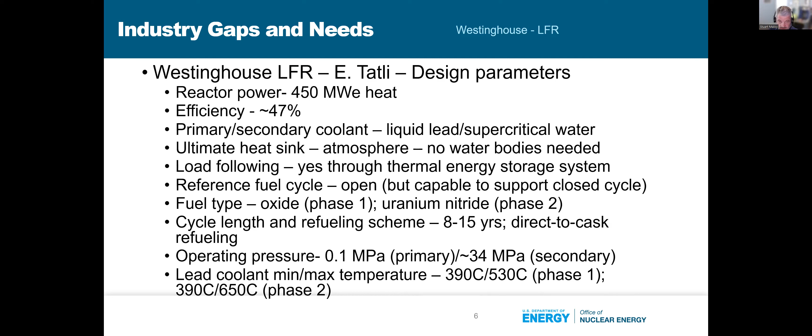So what materials are they looking at? Just like in the Oklo design, at lower temperature in phase 1 they're looking at using existing qualified materials with coatings, so 316L may be the one they start with. Another material that has a lot of experience as cladding, especially in Europe, is 15 chrome, 15 nickel Ti, so 1515 Ti. It's also called very similar to AIM-1, which they used in Europe for the Phénix reactors.

So these are sort of their base materials that do have a lot of irradiation experience, but they would have to be used probably with a coating and cladding. A nice table is shown here to the right with the candidate materials for the guard vessel, reactor internals, and the fuel rod cladding, where the 1515 Ti is shown with a coating.

But in phase 2, if they go to higher temperatures, they would want to qualify new materials for greater reliability. So maybe it's austenitic forming or alumina-forming austenitics, or FeCrAl, or ODS with a cladding. So a more radiation-tolerant cladding, but with a coating on it to prevent corrosion, or even going up to SiC in the end. So they're really pushing to the materials that we in the IMARC program would want to be able to address.

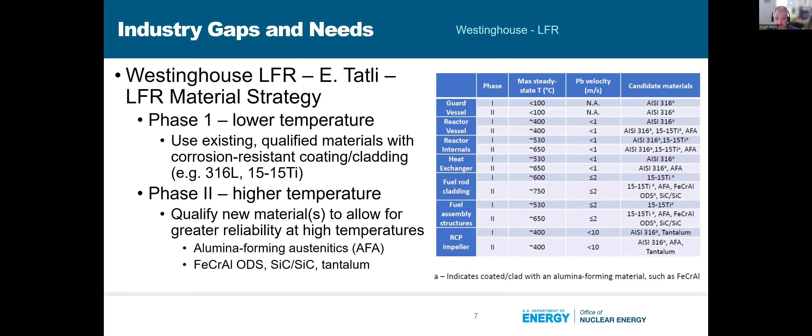So that's a nice overview of a sodium fast reactor as well as a lead fast reactor.

And then what we got was a nice overview from TerraPower on their molten chloride fast reactor, with Cheng Zhu and Matt Wargon as the authors and presenters. Their program is focused on materials testing for design analysis, as well as leveraging that materials testing for NRC licensing and qualification. They have a lot of materials of interest. In general, the first materials are nickel-based materials, alloy 625 and alloy 617. These are their preferred materials because of their known high temperature performance, their known corrosion performance, and because they're weldable and have an ASME code case.

But some other materials are 316H, most probably with a coating, or maybe even in the future they could go to refractory alloys or ceramics. So once again, these are areas where I think this program could really help out.

But there's a lot of engineering properties they need for these materials, especially if they're running at high temperature. You can see they want to go from 550 up to 800 degrees C, so quite high temperature. At those temperatures, creep, fatigue, corrosion, and erosion are all areas where they really need information. And on top of that, they need radiation effects on their mechanical properties at those temperatures, in the 0 to 100 dPa fast spectrum area.

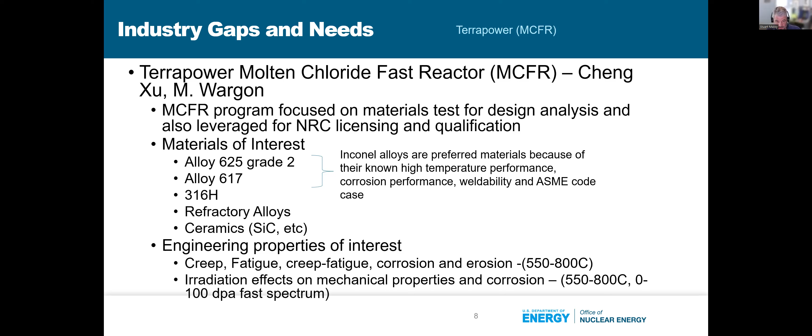So that sort of summarized three advanced reactor industry needs talks that were given. If you want more detail, they're already on the GAIN website, so you can pull those down. There are also some nice overview talks on university and national lab capabilities and methods.

I talked about it a little bit in the beginning, but the capability needs for irradiated and radioactive material—that overview was given by Simon Pimblott from INL. There was also some work on developing advanced ODS alloys, some of the research already done, and some of the routes needed for applying it for these materials, given by T.S. Byun at Oak Ridge. And then, more related to high dose irradiation testing if we're going to do that with ion irradiation, there was a nice overview of some nanoscale mechanical testing techniques by Sid Pathak at Iowa State University.

And then finally, there was a nice overview on the program we've already talked about a couple times in some of the questions—a high dose ion irradiation program led by Gary Was that's been going on for the last six years. A nice overview of that program was given by Kevin Field.

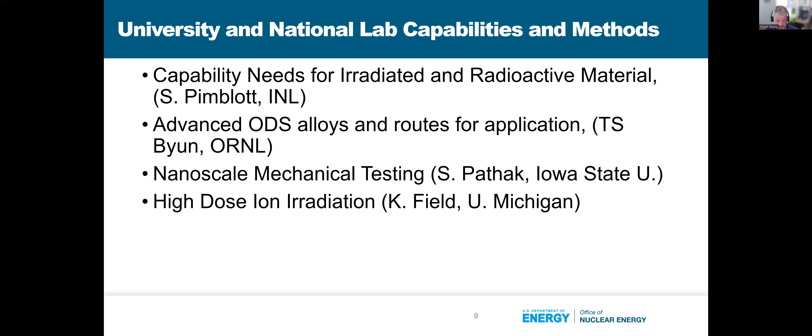So I didn't have time to go into all the detail on those. I wanted to center on the industry needs, and hopefully that was helpful to you. I do have some time now for questions before we get into the different materials areas.

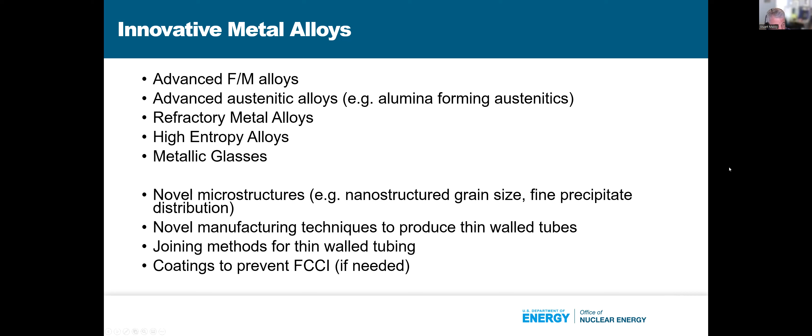So we'll cover some of that more in the next category. Maybe I'll just go ahead and move on to the next category, which is a sort of a sister to the previous category: oxide dispersion strengthened alloys. These are metal alloys that have oxide dispersion strengthening. There's been a lot of research previously on developing those materials, but there's still a need for easy or economically favorable methods of making these alloys into thin-walled tubes. So that's clearly one of the issues for oxide dispersion strengthened steels.

There's a lot of nice data - if you can make a fine dispersion that's uniform in the material, there's a lot of nice data that shows they have excellent and incredible radiation tolerance, but these need to be made into thin-walled tubes if it's a ferritic steel. And perhaps also there's the ODS FeCrAl - that could have a real application in lead reactors or lead fast reactors. But a lot of the initial materials like MA956 and PM2000 don't really have much of a fine oxide dispersion. So they don't have the 2 to 3 nanometer oxide size - these are 5 to 10 or even larger nanometer oxide, and so not as high a density as what you can get in the 14YWT.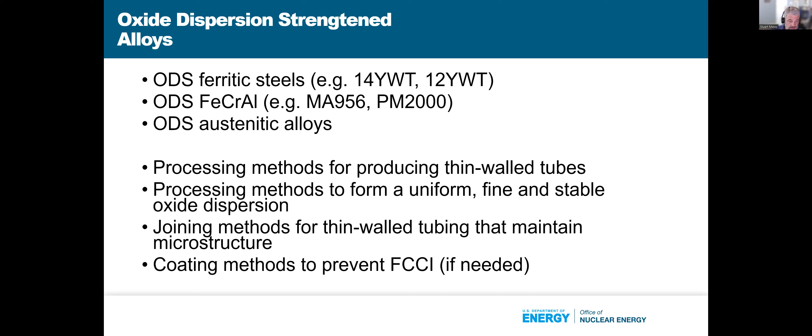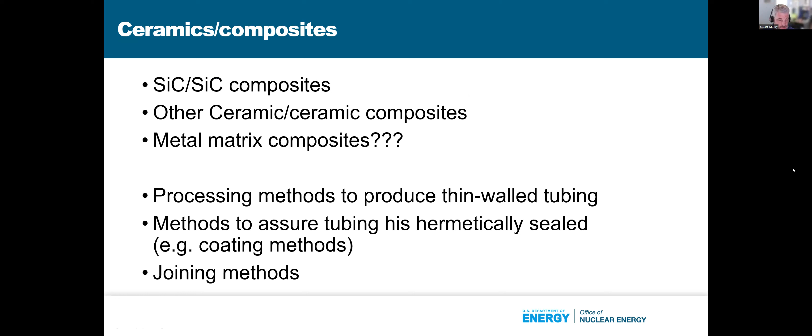So I don't see any comments, so maybe I'll move over to the last area. This last area is really critical, and the reason why I'm trying to get your input is to make sure we cover everything in these areas. I should also note that these slides will be available online, and if you see something missing, please don't hesitate to send an email to me or Sue so we can get that input for these different material categories.

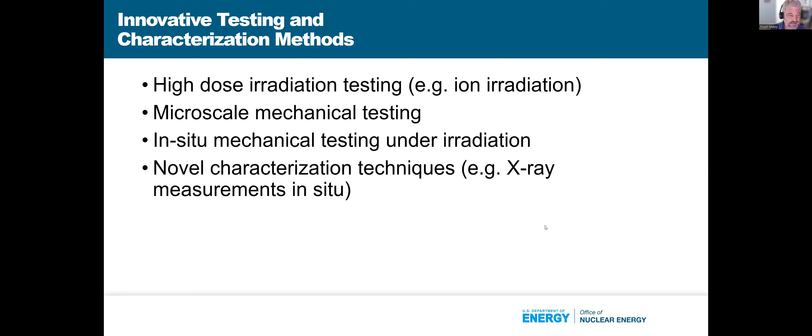Okay. So then I just went out of. So let me get back. Yeah, so I'm actually down to the last slide.